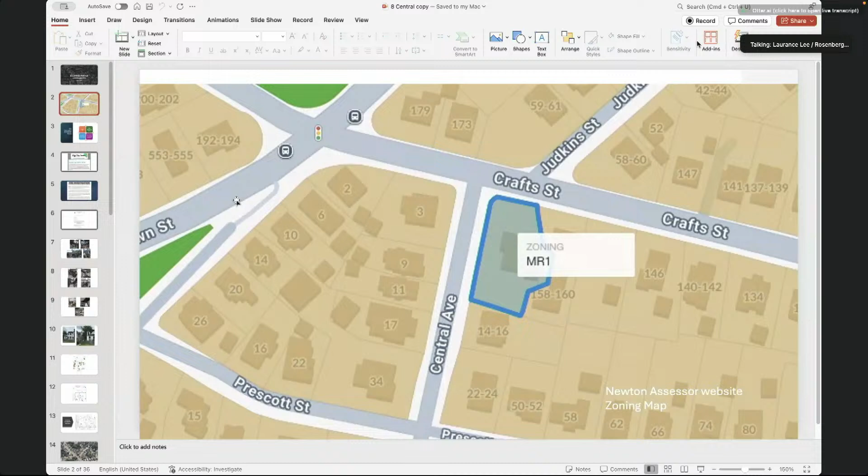So we're at 8 Central, which is in Ward 2, at the corner of Craft Street and Central Avenue. We're located in an MR1 zoning district. As you can see by my cursor, the blue outline is our property, and we are just on the edge of Ward 2. Right on Craft Street, that's actually the border between Wards 1 and 2. What we're looking for is a special permit for 3 single-family attached dwellings on 15,000 square feet of land. Currently, the by-right use is a single and 2-family house, and the 3-family requires a special permit.

So very quickly, to take you back about a year or so, there was an unfortunate fire at the former house, which was on the National Historic Places. There was a 3-alarm fire, an unfortunate construction-related fire that started and really created a hazard and rendered the property quite unsafe and really not salvageable. These are some articles I'm showing for you tonight that I also showed about a year or so ago at the Newton Historical Commission.

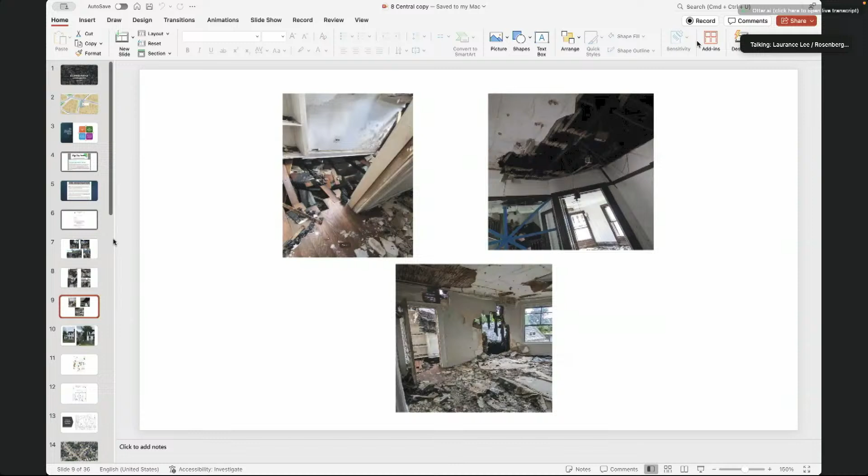So after the fire, the Inspectional Services Department deemed the property unsafe and that it really was in danger of collapsing. There are some photographs of the house that was damaged, and this is some interior photographs that we had to quickly take to assess the structural integrity of the house. I can come back to any of these. It was very substantial damage, unfortunately.

And here's some exterior photos. The former house was very, very close to our next door neighbor, as you can see from this photograph, and you can see it on the site plans that I will show you at a later time.

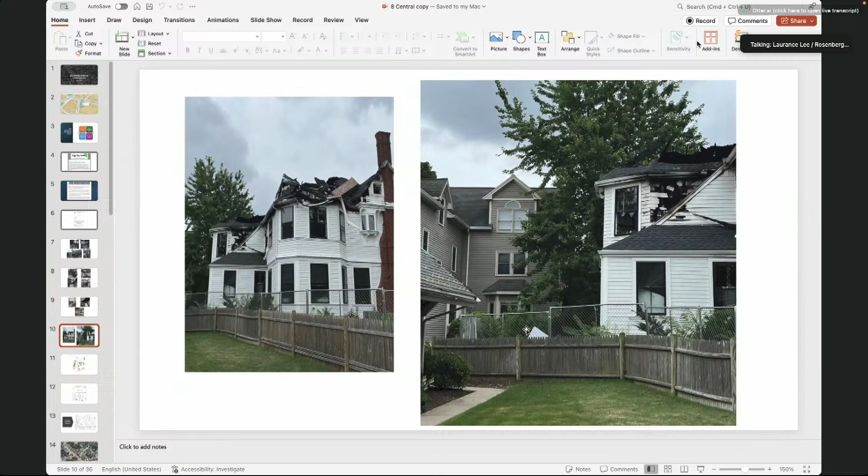These setbacks, which are not shown on this land court plan, are just around 10 feet, just by way of reference.

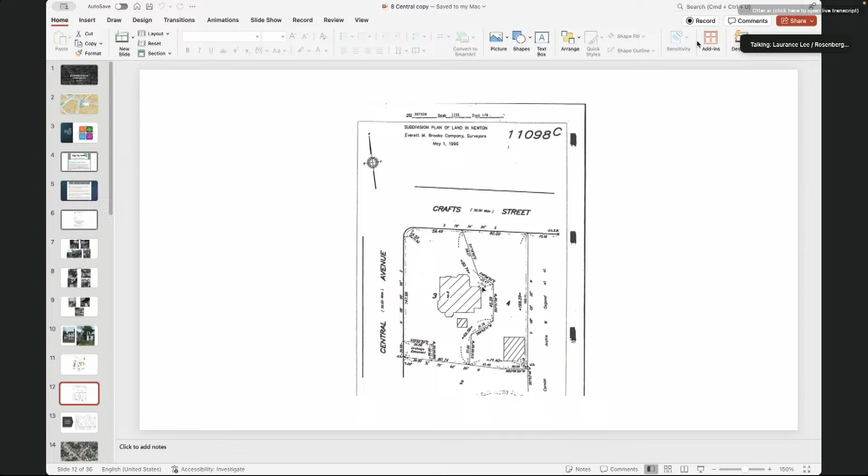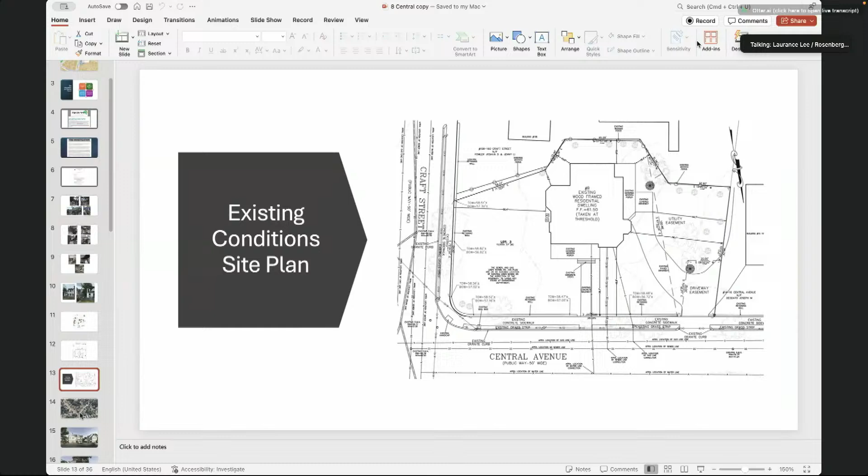Here's an existing condition site plan that gives you a little bit more detail of the house that was previously there. Again, the side setbacks were just conforming to new lot standards at 10 feet, and it was quite close to the border.

Here's a rendering of what it may look like with a new proposed development, which is broken up into 2 different buildings. This is right at the corner, this is Central Avenue, and Craft Street is on this side. Here's a Google Earth image with a computer generated image of what the house may look like.

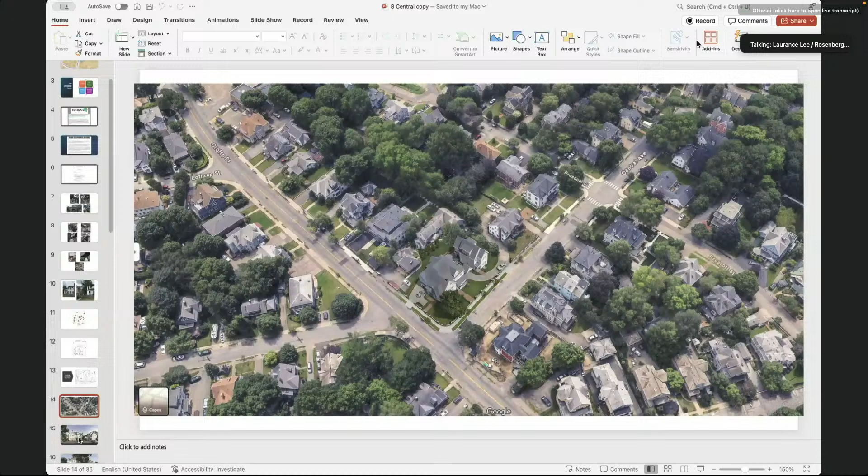My client understood very well that this is a very prominent, very visible corner. When he took on this project, he knew that, number one, the house that was there could not be salvaged, and two, that he had to really put something that kept the spirit alive. So here, I think the planning department noted a lot of the architectural features, the porte cochere, the covered porch, gable dormers, the ornamental features that were previously in the Queen Anne building, and it's now trying to replicate that to a certain degree in the project.

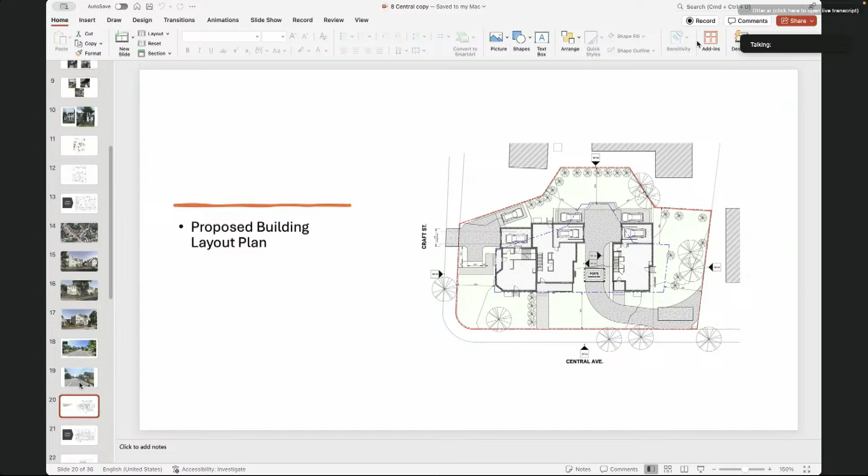Proposed condition site plan. Again, this will be building number 1 with 2 units, building number 2 with one single unit. There's a shared driveway that comes on Central Avenue here. A 1-car garage for one unit with exterior parking and a mirror image on the other side. The unit on Craft Street has its own driveway, and there's an exterior parking space to the left of the garage.

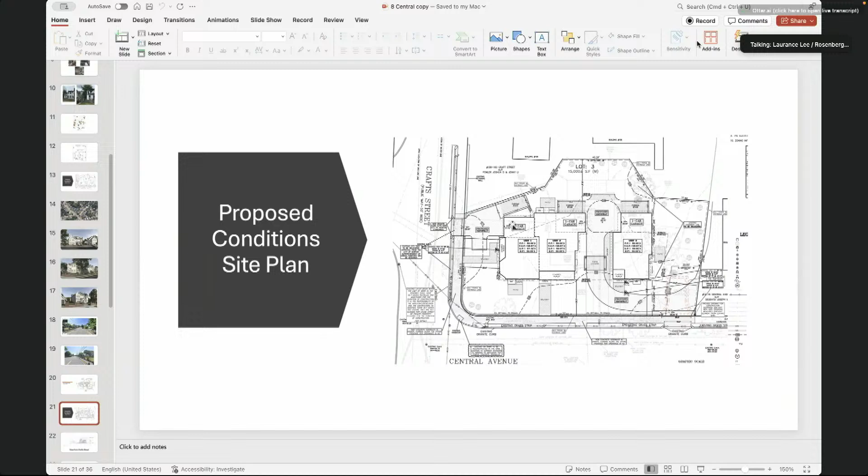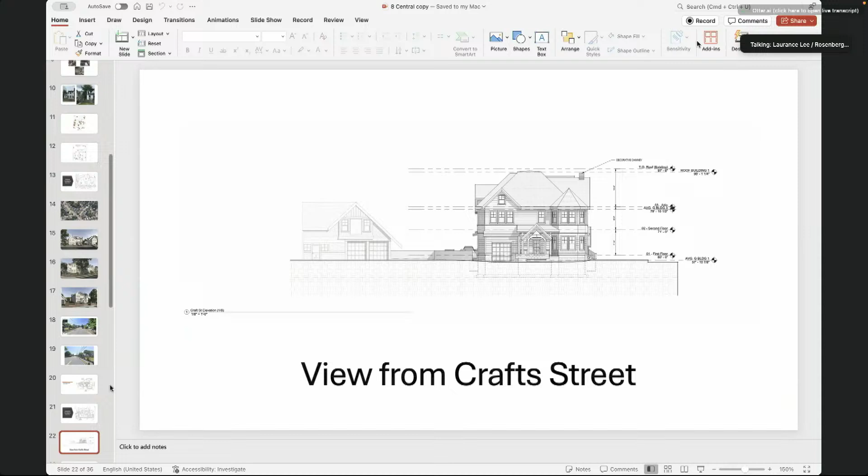Here's a 2D elevation, a view from Crafts Street, our neighbor. To the left here is building number 1. We can come back to any of these if you'd like to see them again. View from Central.

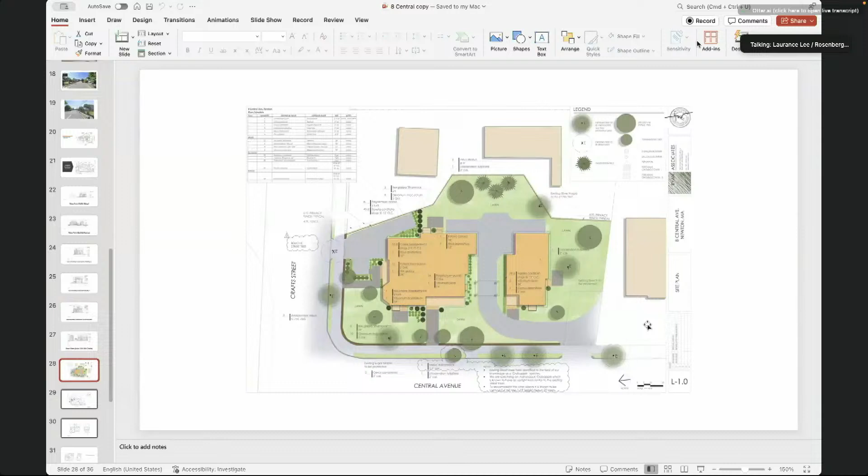We've had our neighborhood meeting, of which Councilor Lucas was there via Zoom, and we've received very good feedback in terms of the design and layout of the buildings.

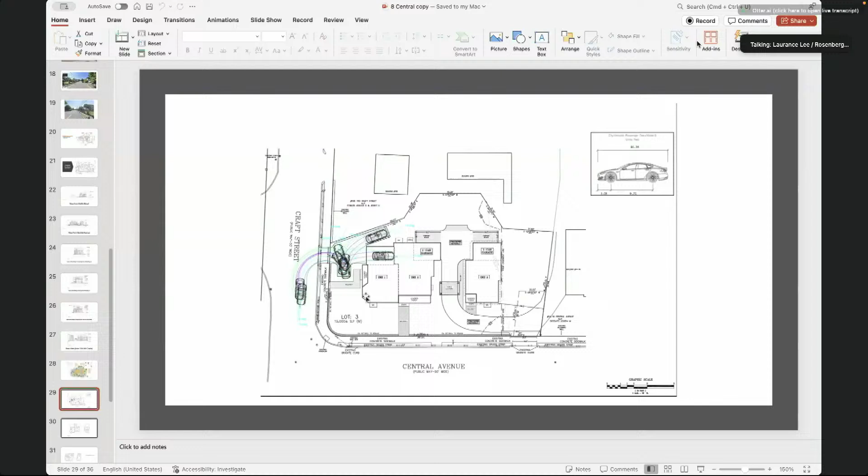Councilor Lucas had requested that we do a turning radius plan on the Crafts Street side. One concern he expressed to me, because he lives nearby, was that as cars come out on Central Avenue, he wanted to ensure the sight lines weren't impacted by the building. As you can see, the building is set back pretty far from the property line and the street, so the sight lines will not be impacted by the building.

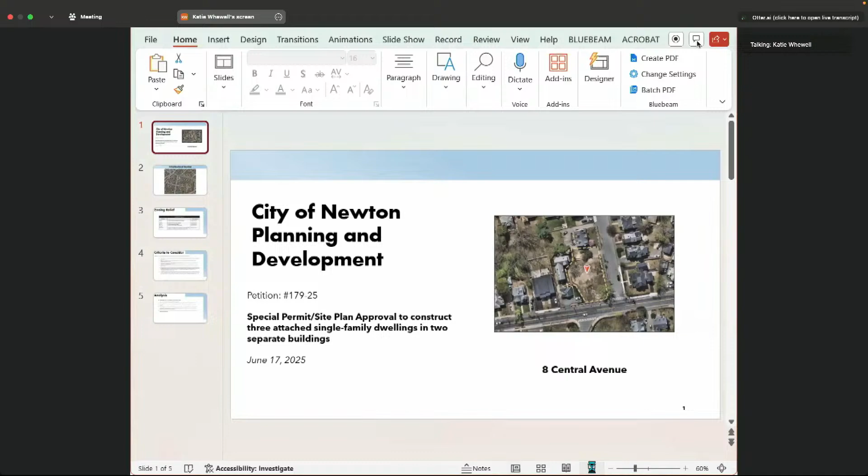179-25, a special permit to construct 3 single-family attached dwellings in 2 separate buildings. The subject property consists of a parcel measuring 15,000 square feet in the multi-residence, or MR1, zoning district. It's located at the corner of Central Ave and Crafts Street and was previously improved with a single-family dwelling constructed circa 1884, also known as the Amos Judkins House.

The site is currently vacant due to a 3-alarm fire in 2024, and a subsequent demolition permit was issued in October 2024 to raze the remaining structure. The area is predominantly residential in the immediate vicinity, with a mix of single and 2-family uses, in addition to commercial uses southeast of the site on Crafts Street and northeast of the site on Watertown Street. The immediate area of the site is also zoned multi-residence 1.

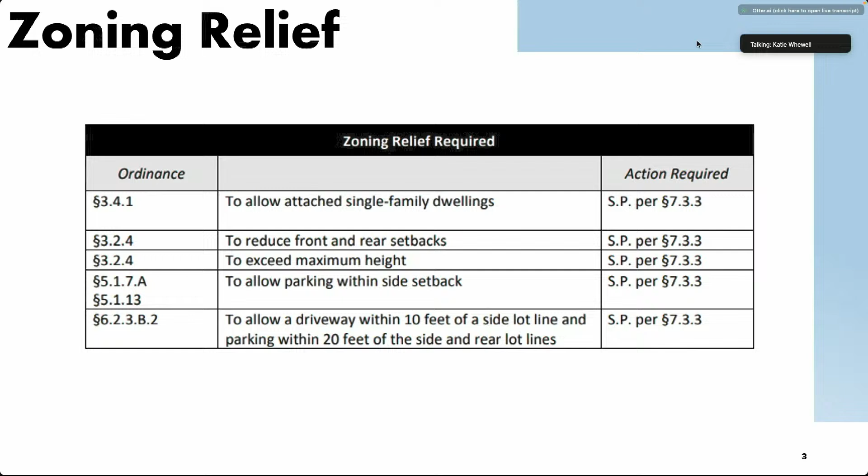The petitioner proposes to construct 3 single-family attached dwellings in 2 separate buildings. As designed, the project requires zoning relief around the site design, building design, and use—specifically, the use of single-family attached dwellings, to reduce the required front and rear setbacks, to exceed the maximum height, to allow parking within the side setback, and to allow a driveway within 10 feet of a side lot line and parking within 20 feet of the side and rear lot lines.

Some planning analysis: we believe the requested use is compatible with nearby uses. It allows for one additional unit above what is allowed by right. The massing is broken up between two separate buildings to mitigate additional building area. We noted many architectural features that point to a thoughtful consideration of design to mirror the 1884 Amos Judkins house. We also note that the height of that house was non-conforming at 39 feet, where 36 is the maximum allowed, so the requested height exceedances of 36.14 feet and 38.19 feet are not dissimilar from the prior building.

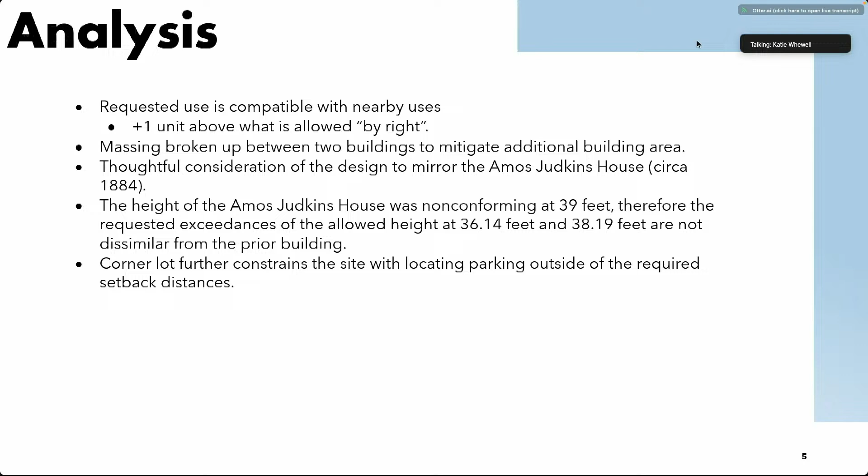Thank you very much. Before we take it into committee, I'm asking if there are any members of the public, either in the chamber or online, who have comments or questions to raise during this public hearing. Raise your hand virtually, or if something comes up later, raise your hand and I'll try to call on you. I don't see any public comment at this time, so we'll take it into the committee.

Are there councilors who have questions or comments about this project? Councilor Leary.

Thank you, Madam Chair. I remember that fire very well because I live fairly close to this location. It was really a tragedy because it was a beautiful Queen Anne home, and I was looking forward to seeing it totally redone. I do appreciate the architectural efforts here—I think it's very similar to the building that was there, it's a very attractive look, and it fits well into the neighborhood. I don't really have any concerns about it. I would like to maximize greenery and reduce any impervious surfaces as much as possible. I am assuming this is an all-electric building, as they usually are now. I don't have any other questions besides that quick review. I think it's a lovely design. Thank you.

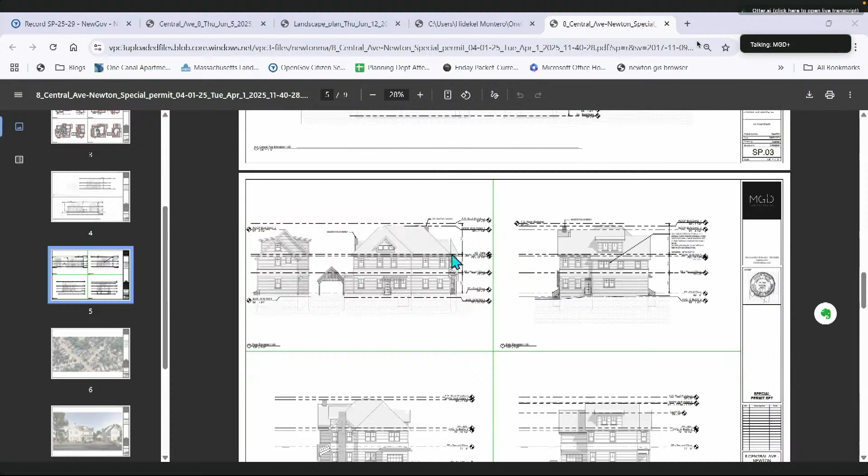And you can use your cursor to point out what you're talking about and where and why. So the building one height, if you can please just show us the building height. I'm sorry, is on the building one height that I wanted to show. Want me to go to the civil plans? I think these architecturals are still showing the maximum height of the building, sorry. The elevation that you were showing, oh okay, it was on the right side.

So I have the Central Ave and then the Crafts Street. Central, okay, I can zoom in on the elevation. I think you can see, if you can just enlarge that so we can see the maximum height that we are showing is 38 feet 2 inches for building one.

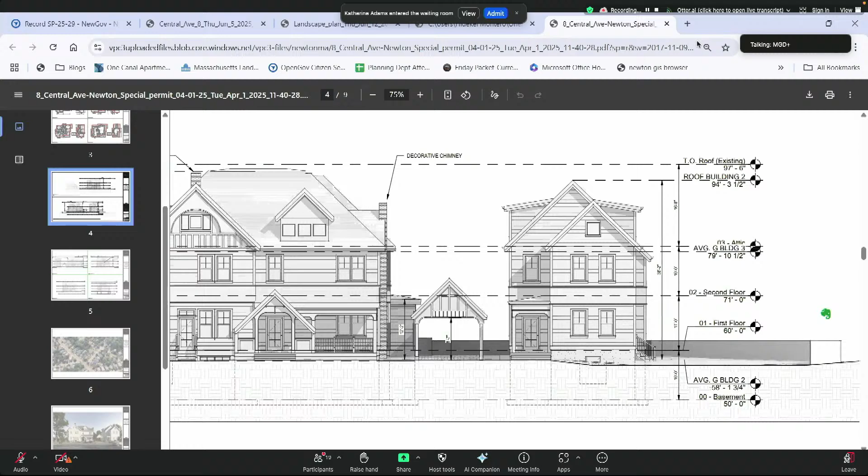And the new building is the one that we try to stay within the maximum height. I think if you can just enlarge that as well so we can see it bigger. So we can read, yes, it's at 36 feet 2 inches, which I would say regarding this, this is the second building, that we call the main building and the second building. This one with the 36 feet 2 inches is probably because there was a moment when we were adjusting the average grade for the building, that probably made that increase.

Honestly, I have to go back to our records. I think the 2 inches, if that is something that the commission would like us to adjust to stay within the maximum height, I'm pretty sure I can review that. Regarding the other building, the one I call building one, we have a higher building here, and this is the one we were trying to preserve the language for the roofs and all that explanation that I made before.

Councilor Block, you did have some other sort of massing footage questions relating to this. I think she certainly just talked about the height, but did she hit everything you were asking about?

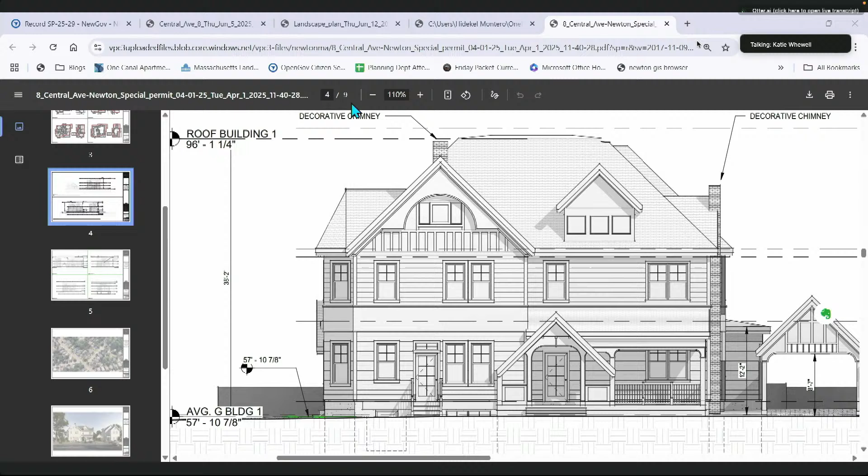Madam Chair, if I may jump in too, I'd like to remind the committee that FAR does not apply to single-family attached dwellings, so there is no relief around FAR. There's no limit to FAR for single-family attached. It's a number that we ask the applicant to provide, and we provide it to the committee, knowing that it's a number the committee sees often and is comfortable with. But I'd just like to remind everyone, there is no zoning relief for FAR. That metric does not apply to single-family attached dwellings.

Thank you, Ms. Whowell, for that reminder. That's really helpful for us to always keep in mind. My sense of Councilor Block's question was about comparing to what is existing and what was, not that this was a legal requirement we needed to follow, but I don't need to speak for Councilor Block. He can follow up with his questions.

I have a few hands next. Do you want to finish, Councilor Block? Yes, thank you, Ms. Whowell, for that reminder. And since you put it in that context, do you happen to have the FAR for the building that was destroyed by fire?

I don't have, I don't know if the, well, our design team has it. So we had limited information about the existing building that was demolished afterward. I remember that we saved some information regarding the height of the building, but I can certainly go to my records and see if we have ever been able to calculate the actual FAR of the building. I will take just one second to go through that.

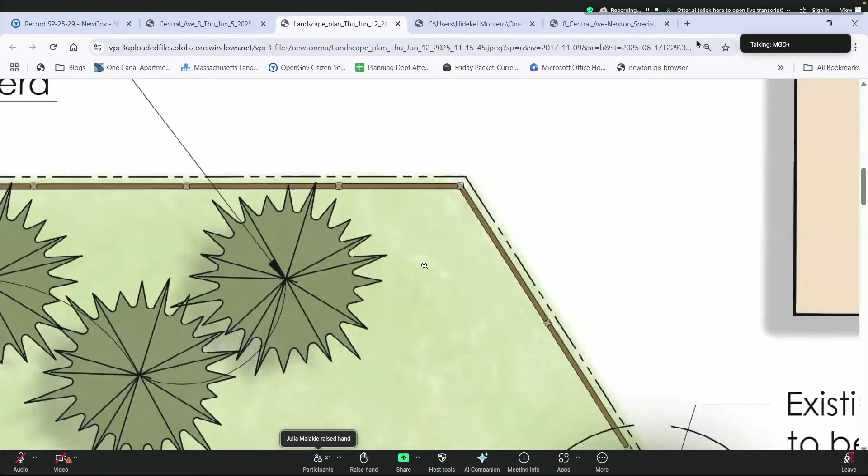Let me just, I'm sorry, the drawings - if I have the ability to share, if someone can help me just show the site plan. That curb cut is existing and is shared with the abutting property on the right side. So what we tried to preserve was that existing curb cut, and the driveway then takes this shape that it goes through between the buildings to the rear of the lot where we accommodated the cars.

Taking into consideration that in the previous existing building we didn't have the cars in the front of the lot, we thought it was a way to preserve what used to be part of the street view in this location. So that made that driveway longer, probably, than necessary. Now if we can replace 50% of that or not, it's kind of difficult for me to say what the number is without doing a quick calculation.

But I can say that, as you can see where the entrance of the curb cut is, the driveway at the curb cut location, we can replace a large portion there with a nice apron, then continue with asphalt up to the area where we have this covered space. We can replace those for permeable pavers. And then when it comes close to the garages, we can replace all that back section for the parking spaces, as well as a decorative portion of that section of the driveways with permeable pavers.

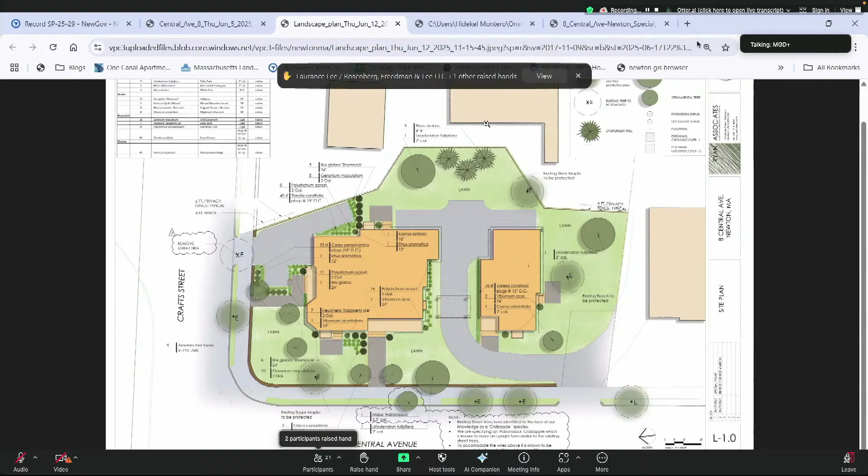Same thing on the Crafts side. I think the whole parking space area can be replaced by permeable pavers. And then we can create a decorative band around that driveway parking section using permeable pavers. I don't know if that is sufficiently descriptive, but I picture in my head something that can be decorative as well as responding to the permeable request.

I'm going to let Councillor Leary respond, but for me, I don't understand why you want to keep any of it as asphalt. The curb cut, it doesn't matter what the material is. This entire driveway could all be permeable pavers with an edge treatment and an apron. I don't understand why you feel there's a need to have any of it be asphalt, but perhaps that's not what Councillor Leary's getting at.

So would you like to have one more shot at that? And then we should really move on. No, I was getting at that. Okay, thank you Chair, I think you expressed that very well.

That would be ideal. And what I'm thinking here is that perhaps we could have it subject to second call, so we could see the design of the driveway and vote on it subject to second call at our next city council meeting. I just want us to have a clear understanding of what it is we're voting on.

Lawrence Lee, we have another councillor's hand up. Are you trying to address that question specifically right now, or can I call on the other councillor first? Yes, I would like to at least give you a definitive answer in terms of what my client can commit to.

Thank you. All the exterior parking spaces, he can commit to doing permeable pavers. And to the extent where, so that automatically increases what it currently is. And then to the extent where we can add any portions of the driveway, we can do so. But at the very minimum, we can commit to doing that for all the exterior parking spaces.

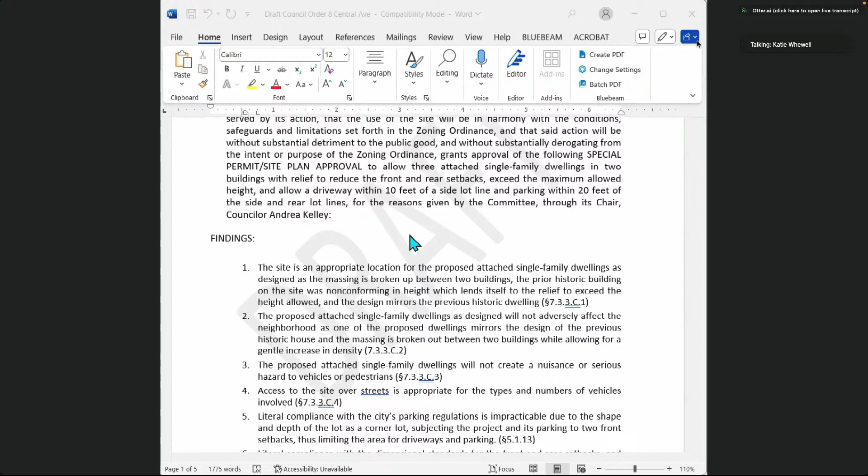Madam Chair, I've also been listening pretty intently and trying to draft a condition as the information comes up, so I think I have something that reflects typically what we see when that condition is added. This is the council order. The findings: we utilize that the site is an appropriate location for the project as designed, as the massing is broken up between the two buildings. The prior historic building on site was non-conforming in height, which lends itself to the relief.

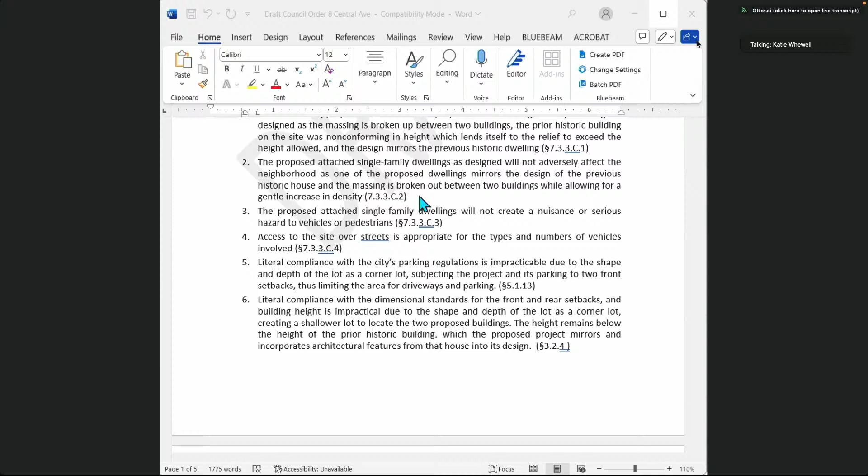And the design mirrors a previous historic dwelling. Will not adversely affect the neighborhood, as one of the dwellings mirrors the design of the previous building, and the massing is broken out between two buildings while allowing for a gentle increase in density of an additional unit allowed above what is by right.

Will not create a nuisance or serious hazard to vehicles or pedestrians. Access to the site over streets is appropriate for the types and numbers of vehicles involved. Literal compliance with the parking regulations is impracticable due to the shape and depth of the lot as a corner lot, subjecting the project and its parking to two front setbacks, also limiting the area for driveways and parking due to the shape of the site.

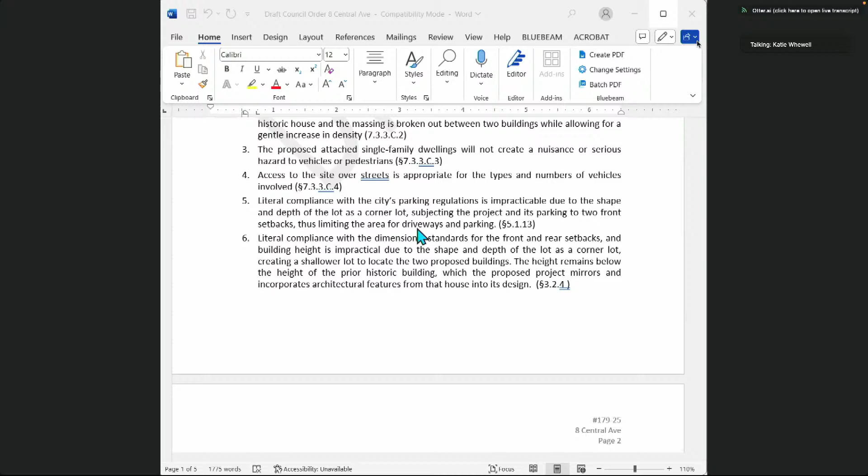Literal compliance with the front and rear setbacks and the building height is impractical due to the shape and depth of the lot as a corner lot, creating a shallower lot to locate the proposed buildings. The height remains below the height of the prior historic building, which the proposed project mirrors and incorporates architectural features from that house into its design.

Moving along to the conditions, we have the standard plan referencing condition in condition 1: the site plan, architectural plans, landscape plan. You'll see highlighted is the condition based on what I heard tonight: the petitioner shall incorporate permeable materials for all surface parking spaces and in the construction of the proposed driveways. So sort of editing as I went there, but when Mr. Lee confirmed the driveways, I was able to make it a little bit cleaner. So that should handle not needing any new plans before this goes to council if this were to be approved.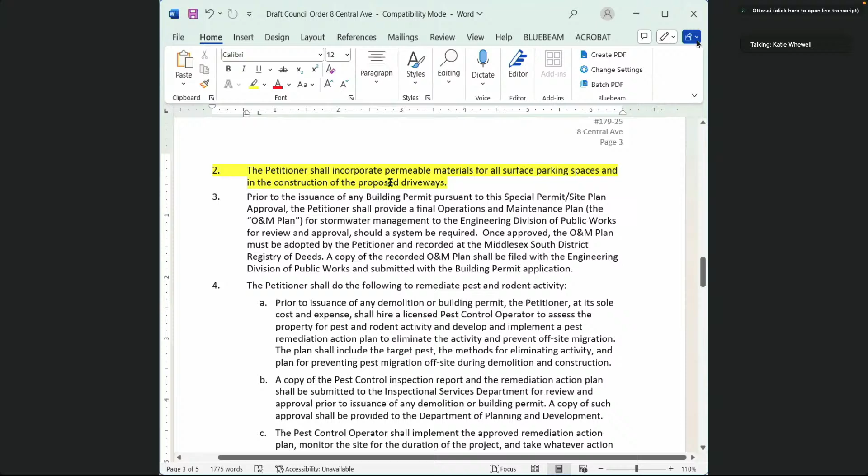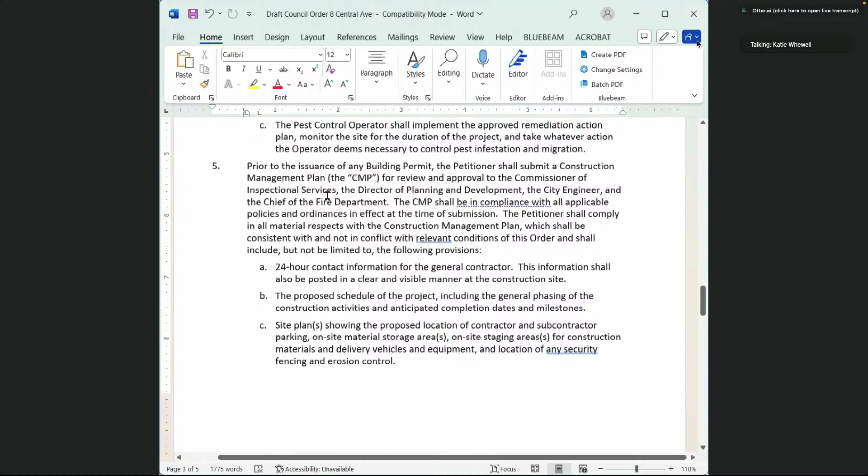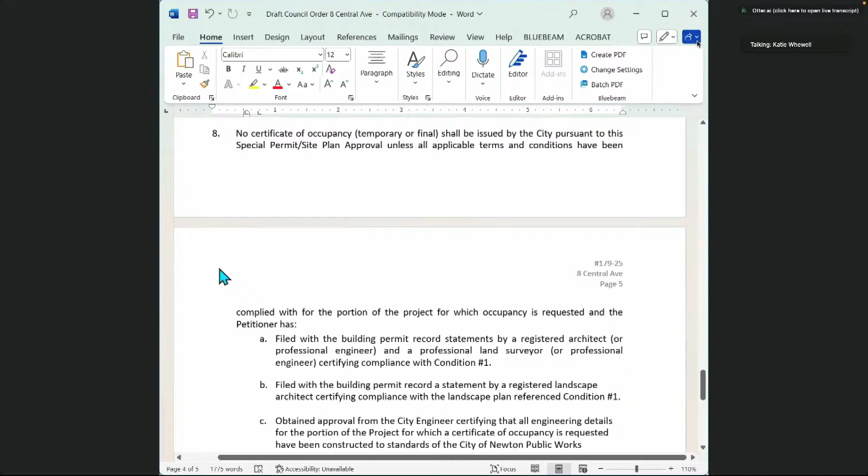We have a standard O&M plan from engineering, standard pest and rodent condition, standard construction management plan condition, construction hours, standard building permit with the requirements that need to be submitted with that building permit application, and then the standard CO condition, and then the condition on maintaining the landscaping that is referenced in the landscaping plan, and also allowing the commissioner to issue temp COs, which is also a standard condition. And that concludes the conditions and findings.

Thank you so much, and you did a great job incorporating that permeable sentence. Thank you. We do have a motion to approve before us. No other hands up, let's take a roll call vote.

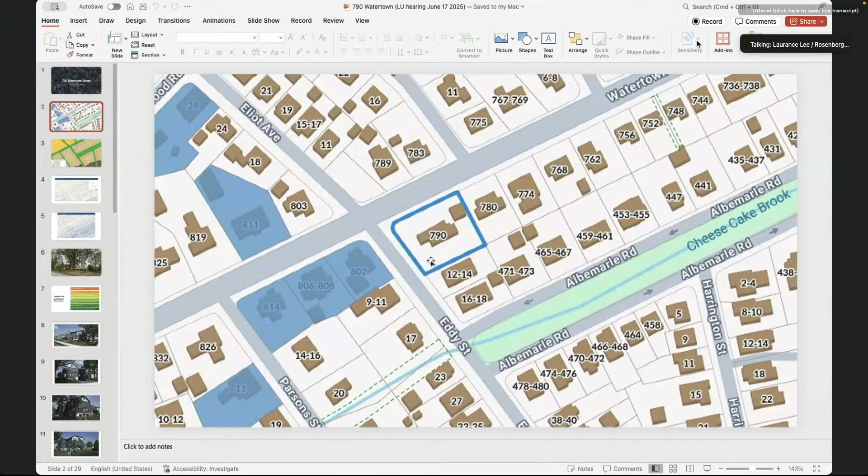This part of the property is very different from the one that you just saw. So I'm going to take you on a little bit of a tour, and then we'll go into the details. We're right at the intersection of Eddy and Watertown Street. One of the unique differences between this property and the one that we just saw is that we do have a conservation area. The Cheesecake Brook is right on Albemarle Road, as you all know, and a lot of our property is actually within the 200-foot riverfront area. I'll get into that in a little bit.

Likewise, we are in an MR1 zoning district. This is one of the larger lots in the area, as you can see from our direct abutters that are all 2-family homes. They're on smaller lots with 2 units apiece. So this piece right here is almost like a mirror image of our land with 4 units in total, just by way of comparison, relativity of size and scale.

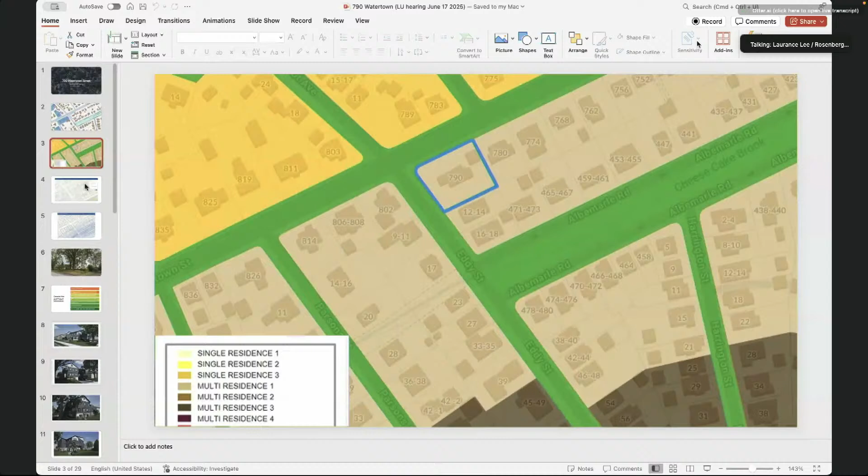...is the fact that this blue line represents the 200-foot riverfront area. Starting from approximately this location, going 200 feet, what we have obtained is an order of conditions. Prior to us coming before you, this project has actually been vetted by conservation, so public hearings have been held for that, and an order of conditions was issued for the project. It also was vetted by the Newton Historical Commission, so they've looked at the plans, they have waived the demolition delay, approving the design of the house.

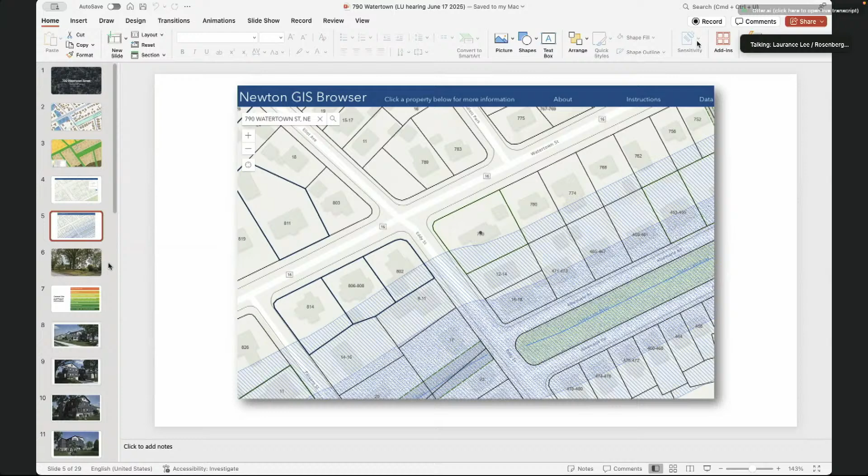So going to the site conditions, we have about 14,000 square feet of land, MR1 zoning district. I mentioned that this is in a 200-foot riverfront area. Conservation has reviewed and issued an order of conditions, and the demolition has been waived.

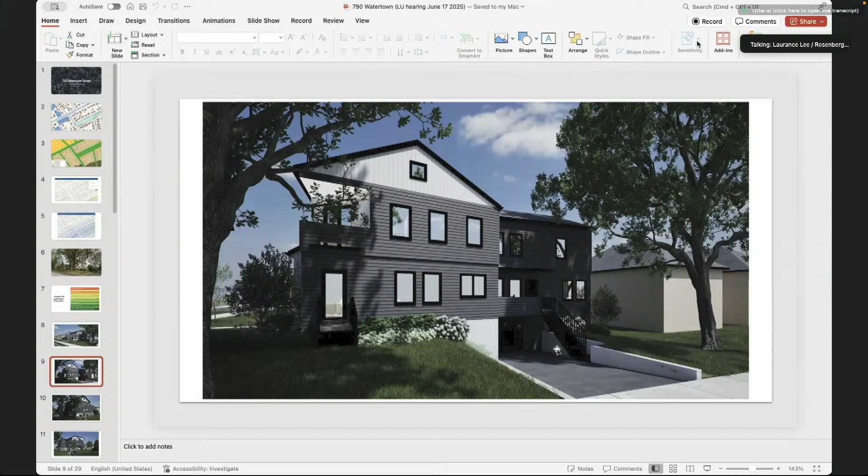The ordinance that was recently amended works like this: because the walls are within 25 feet of one another, they take the highest point of one end and the lowest point on another. If that's greater than 4 feet, even if the wall itself is under 4 feet, it triggers the 4-foot rule. So I wanted to make sure everyone understands it's not the series of walls that triggers relief—it's really just at the end, as we approach the house, that triggers the 4-foot retaining wall requirement.

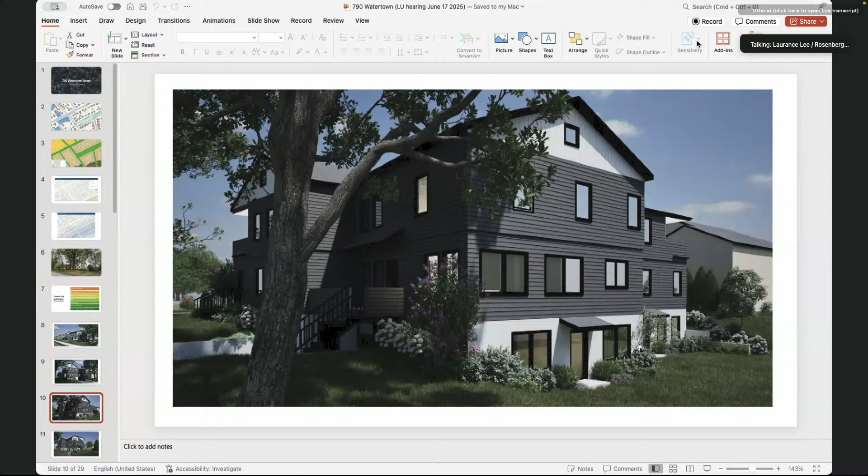Here's the view from the Eddy Street side at the back of the property. As the street and the property slope downwards, more of the house is exposed, just as it currently is. At the front of the property on Watertown Street, it'll be looked at as a 2.5 story tall building, as it currently is with the existing house. Once you get to the back, where it slopes downward, you see more of the house—hence the 3-story component you see on the waivers.

Kind of piggybacking off what we just heard in the previous petition—once you get into the MR district and single family attached dwellings, the FAR component is not a requirement and not a factor. That's because single family attached dwellings have a higher setback requirement, which squeezes the building towards the middle of the site so as to reduce the impact on our abutters, for example to our left and also to the rear in this instance.

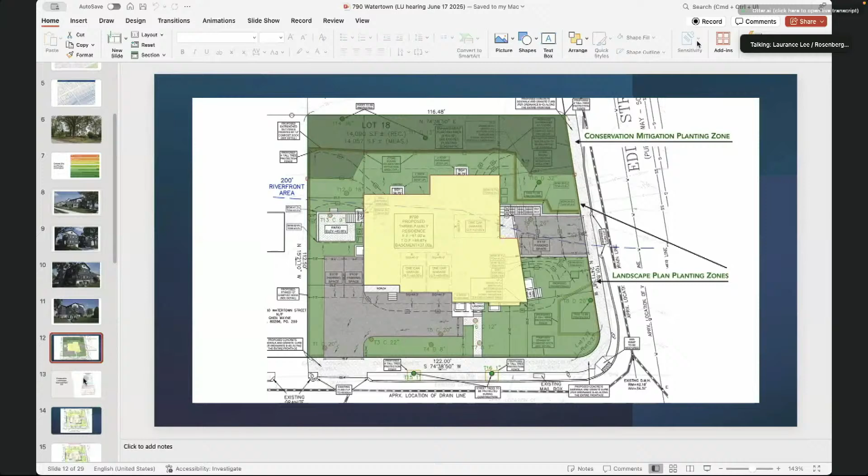It's a little too small to read, but this is all in your packet—this is the order of conditions with the planting list. It shows the rear of the property with the heavily planted area that's already been approved by the Conservation Commission.

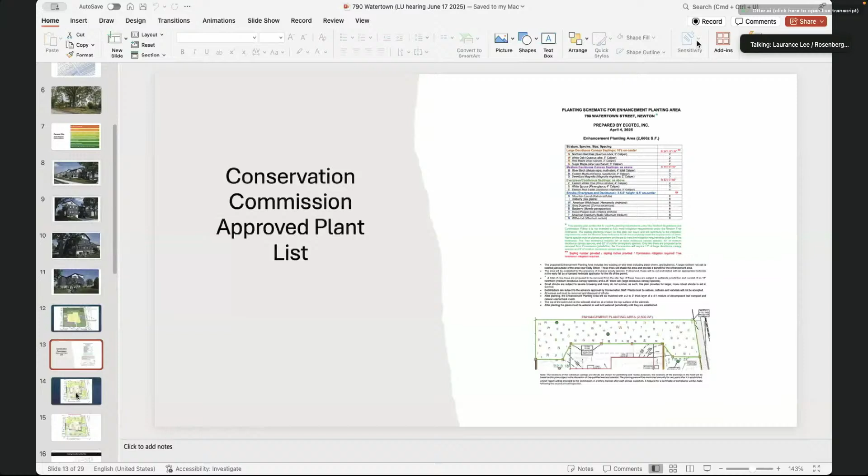There's also a landscape plan in your packet that gives a bit more detail. There will be some trees right along the front—privacy trees planted alongside. We've been in communication with our neighbors and had a neighborhood meeting.

Just as of today, we were contacted by a direct abutter with a rather late request, which we are going to honor. This next slide shows the request we received today from our abutter to the left. He and his wife sent an email in support of this petition to the city council earlier today, but asked us to shave off this red portion of the patio. We're going to cut this back, with some adjustments needed because there's a very short retaining wall along this edge. The idea is we'll shave this off and make minor adjustments so the area will be no bigger square footage wise than it is today, but we'll pull it away from his property line as requested.

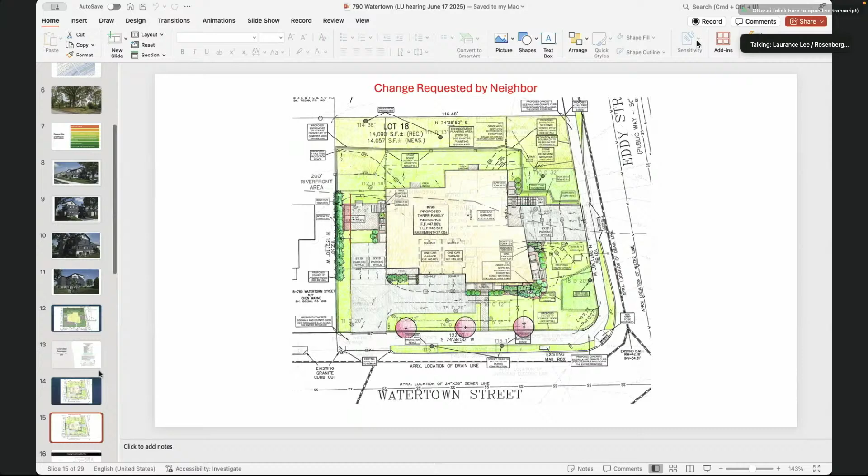Here's an existing condition site plan. One thing our neighbors appreciated was that there's an existing garage really close to the property line, and that's going to go away. That will also free up space and open things up. There'll be a 25-foot buffer between his property, our shared property line, and the new house, so there will not be a building here that's obstructive to them.

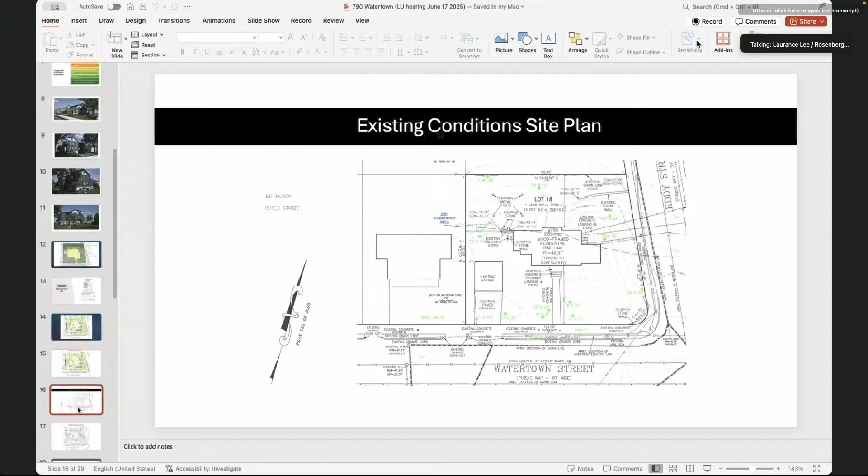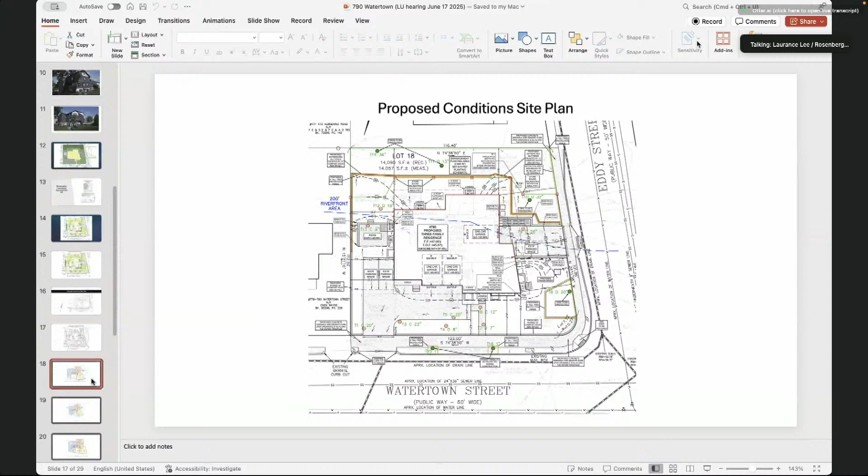For example, when you change the structure use—let's say even if the structure is as is, and you use it as a two-family house—the basement is counted at the midpoint of the average grades, compared with the average grade. If the midpoint is below the average grade, the basement doesn't count towards FAR. The moment you change that use from a two-family to, say, a three-family use, the mathematical formula changes from a midpoint to a two-thirds requirement, such that if the average grade is lower than two-thirds, then it counts. So in this instance, that's one of the reasons this is being viewed as a 3-story building, partly because of the grade.

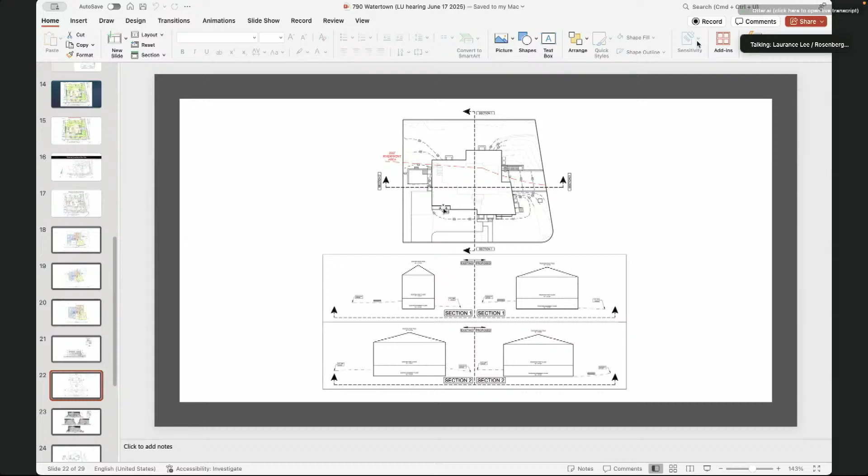Cross-section of the existing and proposed house. Again, any changes are really confined to the house itself. And regarding the retaining walls, one reason we did it this way was to preserve the grading so the tree located here, where my cursor is, is least impacted in terms of its roots and soils. We want to keep that undisturbed as much as we can at that location.

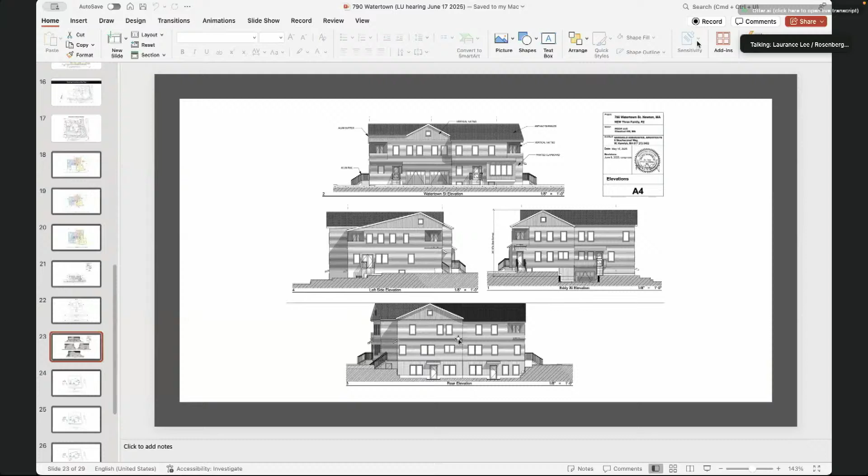These are the 2-dimensional elevations. We can come back to any one of these if you like. But to my point earlier, if you're standing on Watertown Street, this would really be looked at as a 2.5-story building. And then obviously as the grade opens up down at the bottom, you see more of the structure.

We have a turning radius plan that shows how the spaces will work. One thing pointed out is the pavement on the Watertown Street side. The existing driveway is really where my cursor is.

This additional pavement acts as a way to allow cars to turn around within the property before they pull out. We know this intersection at Eddy Street sometimes gets a little busy, so for safety purposes it's good for folks to be able to turn around here before pulling out onto Watertown Street. Currently that doesn't happen because there's a garage, and cars have to back out onto Watertown Street directly. I can come back to any of these plans if you'd like to see them again, but that shows pretty much every space and how it works, coming in and out.

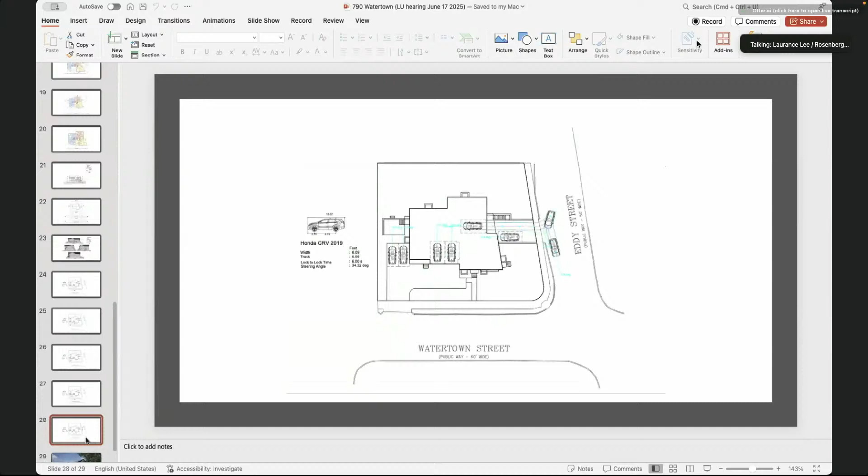And then we'll end on the rendering of the house again. Happy to answer any questions you may have.

Thank you, Mr. Lee, it was very thorough. Let's see what planning has to add.

Thank you, Madam Chair. This is special permit 155-25, a request to raze the existing dwelling and construct 3 single-family attached dwellings in one building. 790 Watertown is located in the Multi-Residence 1 zoning district. The site is located between the West Newton commuter rail station and the Newtonville commuter rail station. The immediate area consists of Multi-Residence 1, Single Residence 3, and Multi-Residence 3 zoning to the south along Washington Street, with nearby uses predominantly single and 2-family. The petitioner proposes to raze the existing single-family dwelling to construct 3 single-family attached dwellings in one building.

The proposed building is located in the center of the lot, with vehicular access from both Watertown Street and Eddy Street. As designed, the project requires relief to reduce both required front setbacks from Watertown Street and Eddy Street. It also requires relief for the use to allow a reduced required lot area, to allow 3 stories, to allow a driveway within 10 feet of a lot line and parking within 20 feet of a lot line, and to allow retaining walls exceeding 4 feet in height. Those retaining walls measure 4.8 feet, only slightly over that 4 foot threshold.

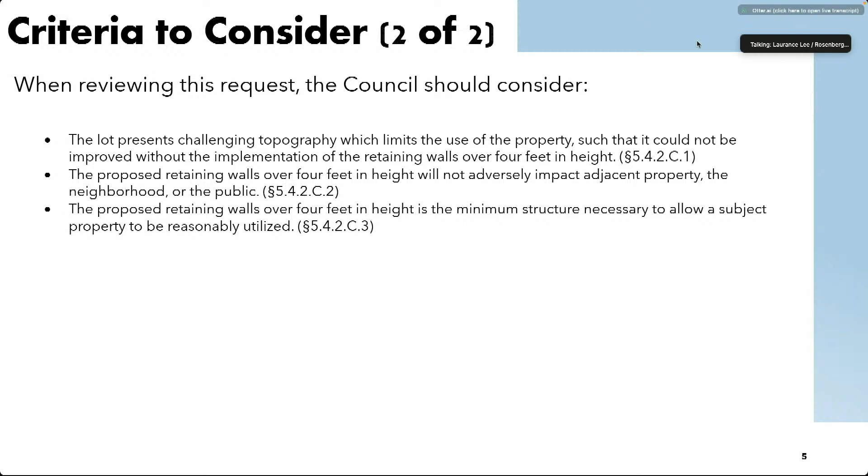Oh no, I apologize, I do want to just add one thing if the chair allows me, after you finish. So my apologies, Ms. Whewell. No worries, thank you.

Just some analysis: the use of single-family attached dwellings is appropriate for the site and neighborhood despite the reduced lot area. The lot is one of the larger lots in the neighborhood, and surrounding it are smaller lots along Albemarle Road where 2 units are sited. So with this larger lot, we thought 3 units is appropriate as proposed.

Planning notes that this project will result in a larger building type than is typical in the neighborhood. However, it wouldn't be completely out of context, as there are larger homes on compact lots further west along Watertown Street. We also noted that the frontage along Watertown Street features an excessive amount of paving, which in addition to the building area further reduces open space to 53.3%, where 50% is the minimum required. We know there are constraints balancing maneuverability and parking requirements while trying to reduce paving, but we do encourage the petitioner to reduce paving where possible.

That concludes the planning presentation. Happy to answer any questions.

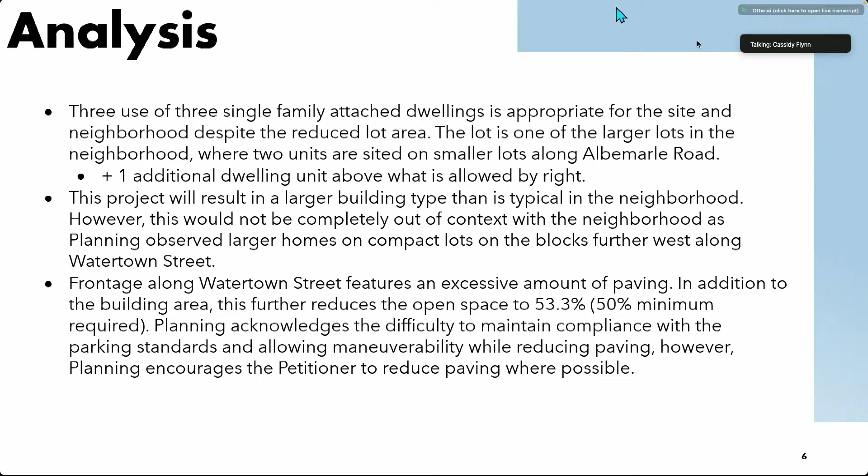Thank you, Ms. Whewell. Before we move on, and I would of course, if there's something important the petitioner needs to squeeze in here, we would like to hear it. But I prefer these meetings not to go back and forth as conversations.

But first, let me just, while I have you, Ms. Whewell, I think I may have misheard you at the very beginning when you stated the docket number you thought this project was. Could you say again what you thought this docket number was? I have 15525, I can triple-check, believe it's 177. Oh, I'm so sorry, probably a holdover from a template. Okay, I just want you to know when things get important that we're all talking about the same docket item. And I did check with the clerk, I think we can safely say this is 177-25.

Okay, Mr. Lee, do you need to say something right now? Yes, Madam Chair, two very quick things. I do want to just note, and I neglected to point that out, in terms of the setback requirement, the proposed transformer is because of the electrification ordinance.

Sometimes we run into this, and I think this was noted in the planning memo as well, so I do want to point that out. ISD views this as a structure which has to meet setback requirements. Hence, we've always been encouraged to add a proposed location. Ultimately, it's the utility company who has to decide, but wherever it ends up, we think it may be around here. If we can find a less visible location, we will certainly try to do that. And if the utility companies decide we have to put it in a prominent location like this, we will add some screening around it as allowed.

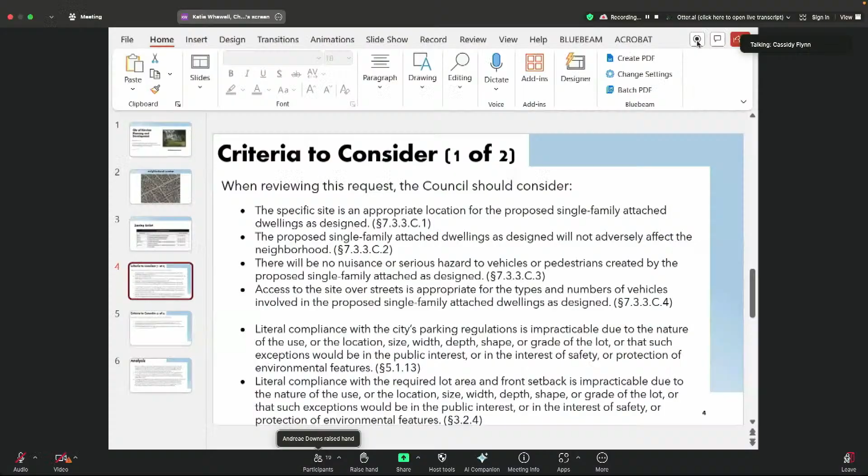Councillor Block, you had your hand up. Yes, thank you very much. If Ms. Whewell could put those criteria back up, I really appreciate the comment you were just making, because I was going to go right to that criterion, the safety one. I think it was the third one or the fourth one. Second and third were the ones I was focusing on too.

The second is also fairly vague. The third, talking about no nuisance or serious hazard to vehicles or pedestrians created by this design. I think the neighbor was pretty eloquent about the traffic conditions at this particular intersection. I know this intersection, it is very popular, and its crash history is well documented. Attorney Lee is correct in one sense, this is a pre-existing condition. That begs the question about whether this proposed design would add to the hazard to vehicles or pedestrians. And I think on its face, a second curb cut, as Councillor Lucas pointed out, is just by necessity going to increase activity and therefore increase the nature of the hazard.

I want to also say that I was struck by Councillor Leary's comment that this appears to be imposed on the neighborhood. That's a very strong way of phrasing it, and it resonated with me. So I agree with you, Madam Chair. I don't think there are the votes tonight to pass this, and I think holding it would be a really good idea. Thank you. We have somebody ready to make that motion. Councillor Leary, last comment, because I'd like us to move on.

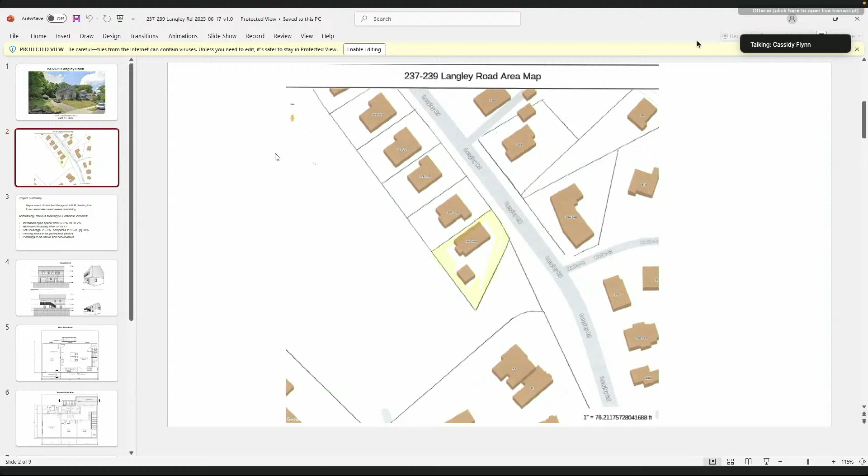One of the first things I did, of course, having been brought in late to the party, so to speak, was to look at the minutes of the land use meeting that were held that night. There were a number of concerns expressed, but I'm pleased to report that there were actually people in the neighborhood at 221 Langley who had appeared in support of the project, as well as one or two other people who supported the project. To the best of my knowledge, there were no opponents.

But the thing that intrigued me was, of course, the comments made by various councilors about the plans. Unfortunately, those reports don't mention who said what, but nonetheless, I set forth to try to address the concerns and questions that were posed that night.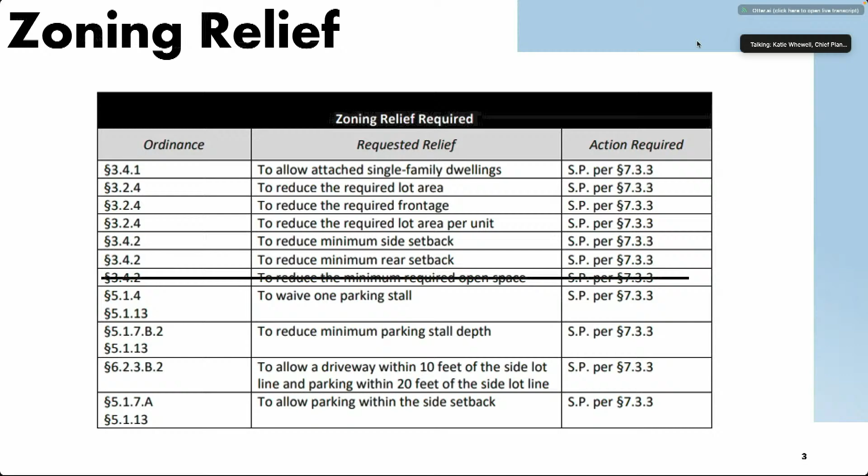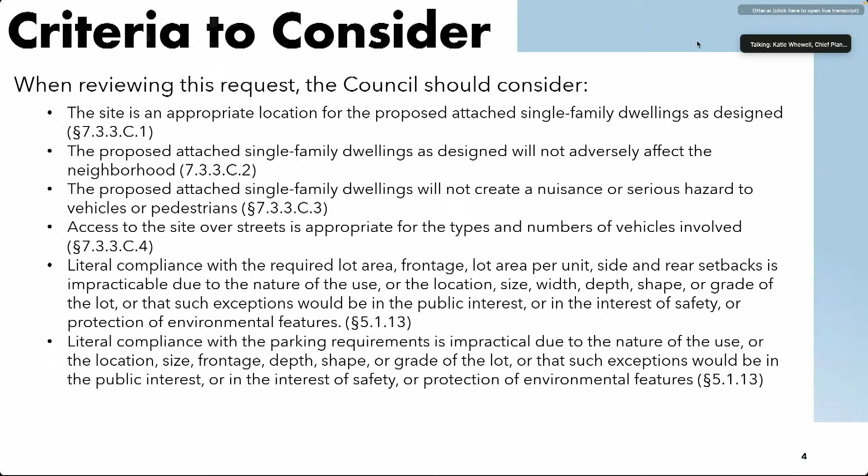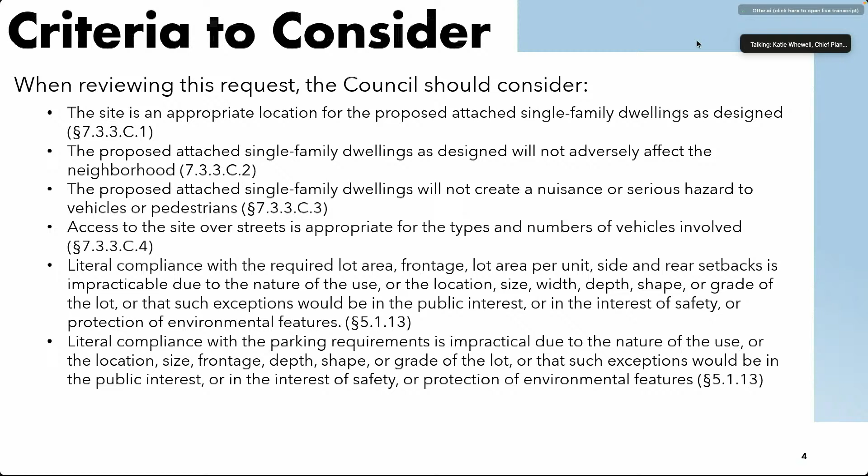So this relief was originally requested. In addition to the plan, we also requested a statement from the applicant that they no longer require this relief, which they have provided. When reviewing the request, the council should consider whether the site is an appropriate location for the proposed single-family attached dwellings as designed, whether they will not adversely affect the neighborhood, whether they will not create a nuisance or serious hazard to vehicles or pedestrians, whether access is appropriate for the types and numbers of vehicles involved, and whether literal compliance with the required lot area, frontage, lot area per unit, side and rear setbacks is impracticable, and whether literal compliance with the parking requirements is impracticable.

So just an update and some analysis: planning requested has been provided, as Attorney Morris noted, showing all building heights and the zoning table all on 1 plan. Planning notes that the proposed building is set back into the site and it will maintain that residential context of the surrounding buildings while allowing for 1 additional dwelling unit.

However, we do note that this project requires several items of relief to allow for this expanded driveway and all the required parking on site. This will result in an increase in paving and a reduction of open space on an already undersized lot.

We are supportive of the waiver of 1 stall given the location, size, and orientation of the lot, and the existing nonconformities. However, due to the site's location within 1/2 mile of the Newton Centre MBTA station, staff would be supportive of a greater parking waiver, such as decreasing that ratio to 1 car per unit or less, to allow for increased open space on site. That is a trade-off planning would be supportive of, to see more green space and reduce the parking below 2 cars per unit.

So that concludes the planning presentation. Happy to answer any questions or bring up any plans.

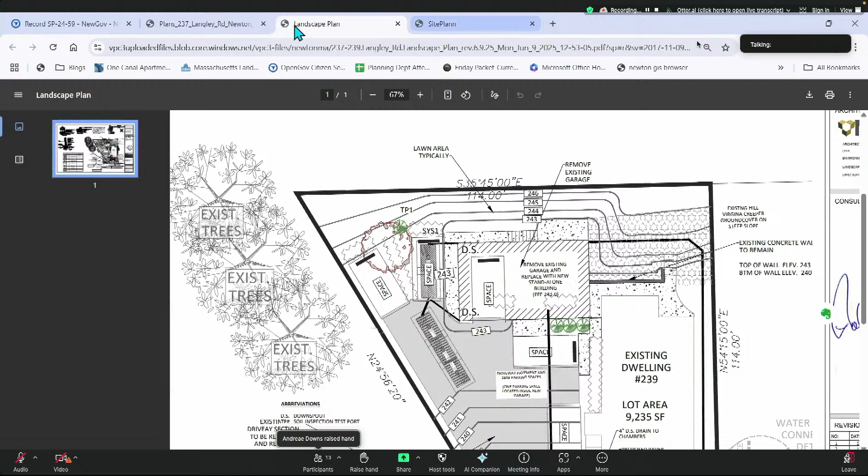It's not shown as attaching to the existing house anywhere, is it? No, it does not attach to the existing house. It's not attached, this is a standalone, detached building. It's close, but yes, it's detached, 3 feet away, I think, as noted in the memo.

And thank you for updating that site plan to show particularly the grades, the existing and proposed. That was a missing thing, and we're happy to see that again.

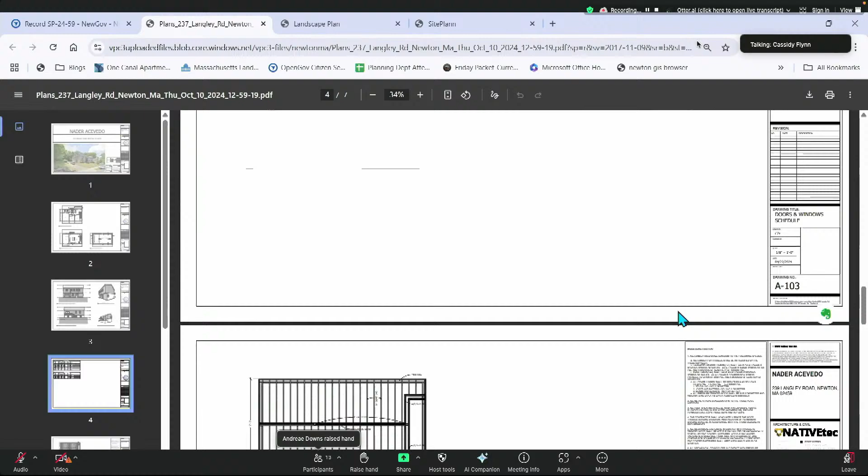Okay, are there any members of the public who would like to speak? I saw a few names before that I recognized that I wondered if we're here for this. No hands from the public. Okay, we will take it into committee.

Councilor Downs, followed by Councilor Lucas. Thank you, Chair. I would support planning's recommendation to reduce the parking to 1 space per unit in order to make this slightly less parking dominated and go better with the aesthetics. Other than that, I think this is a fine proposal and I would support it.

Thank you, Councilor Downs. Councilor Lucas? Thank you, Chair. Mr. Morris, congratulations, first of all. Hopefully you didn't trade your best player for pennies on the dollar. One more game Thursday night. All right, yeah, not number 11, no, trade him in the offseason.

So I just want to be absolutely certain what we are going to approve tonight. I understand your client lives in the current principal home, correct? Correct, and that's a 2-family home. Yes, it is. And they are going to move into the new home. Yes, that's correct.

And you said, can your client put up the floor plans? I just want to make sure we're looking at the same thing. Gabriel, can you put up the floor plans, the rest of the new unit? Okay, so the first floor has a living room, bathroom, closet, kitchen, and the garage that's there. Can you go to the second floor?

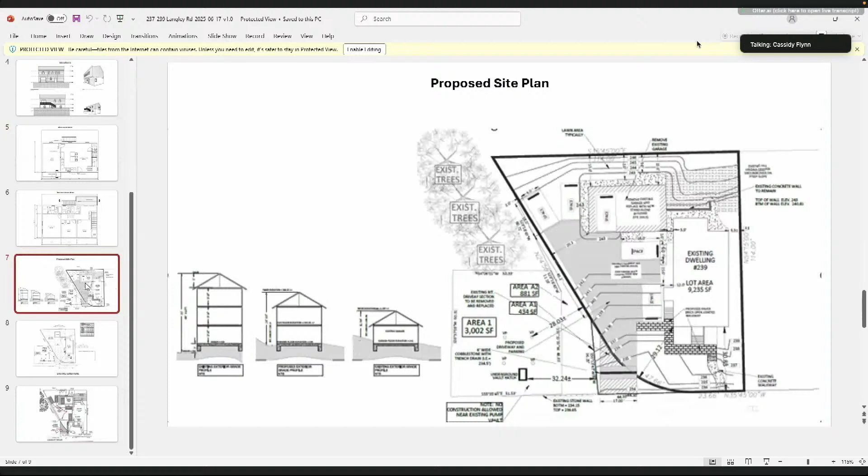Thank you, Chair. Could someone put back the site plan that shows the proposed parking stalls, Gabriel? Go to the circulation one. That more clearly demonstrates the parking. Yeah, there we go. Which of those spaces would you eliminate? Well, it's not for me to really comment on that. The one of the 2 at the top. Or the one in the middle. First of all, let me just say, I think that 2 parking stalls each for the 2 families that are living in the current dwelling, and 1 parking stall for the new house, let's call it, is perfectly reasonable from a utilization standpoint. So I guess I part company with Counselor Downs and perhaps Counselor Leary, if that's what you were suggesting.

And I'm not really sure that that's what Counselor Lebovitz was suggesting, but he can address that. But this is a very crowded site, and the two parking stalls that are nearly touching, what is the distance between those two stalls at its closest point? Well, remember, it's the stall, it's the dimensions of the stall, those aren't the cars themselves. I appreciate that. So what are the dimensions? 9 by 18. 9 by 18, and using 9 by 18, what is the distance between the outline of those stalls, the rear bumpers, that the driver of the car to the right could walk by? Do you happen to know what that distance is? It doesn't look very much. And that's a hazard.

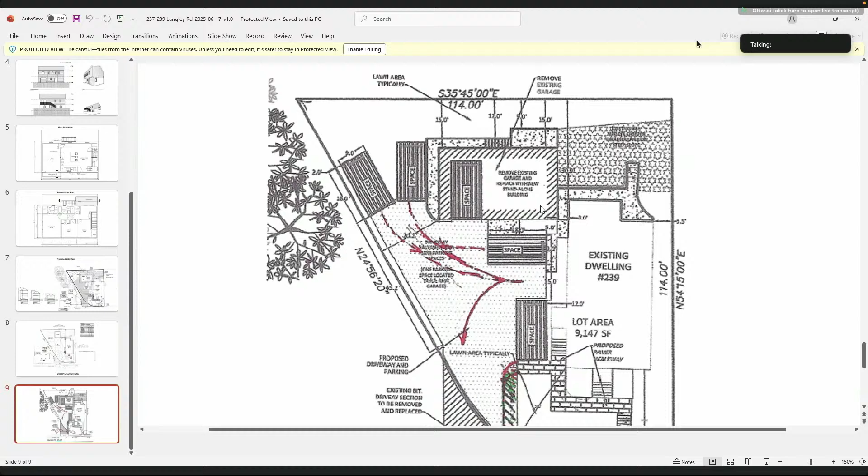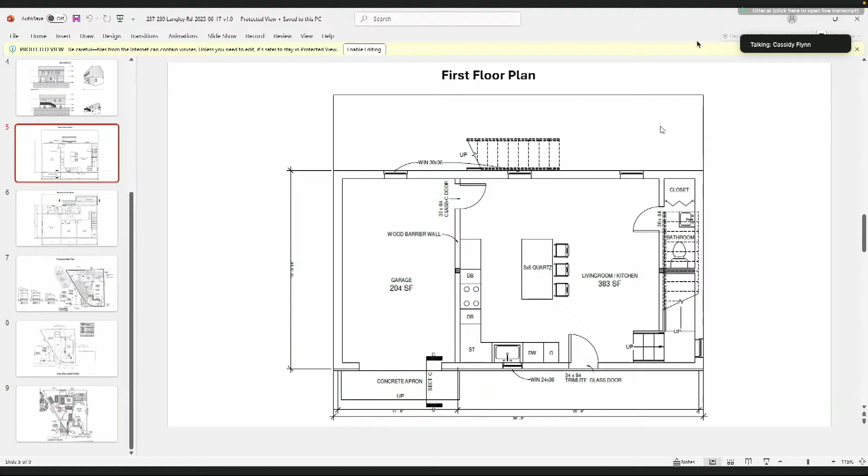Thank you, Gay. Also, my daughter Patricia, she's on the call. She was here 2 weeks ago, and she drove. She drives, and they visit me. Patricia was here 2 weeks ago.

Your family visits you, you want the parking spots, we've got it. I think we need to wrap it up. Mr. Morris, what is it you urgently want to say?

I think that 5th parking space largely serves as a visitor space, and to that extent, it's not contributing to the everyday ins and outs of the automobiles. I interpret it the same way. I'm like Councilor Block - for me, given this situation and this funny site and this family situation, I'm not opposed to the 5 spaces.

I want to check in though with Councilors Leary and Downs, and anyone else, perhaps Lobovitz, if it's a deal breaker for them to have these spaces, if they're going to vote against this project, I'd like to know that now so I can figure out if we're going to proceed with this.

You said that you would not vote for it if it had all these parking spaces? That's correct, Councilor Leary? I think it's a jumbled mess in there, and I think they could do with fewer. It's just not - it's not a special permit. When we do a special permit, we want it to meet certain guidelines and make it work. This does not work. It's just got a pile of cars all in one little small spot. Councilor Downs?

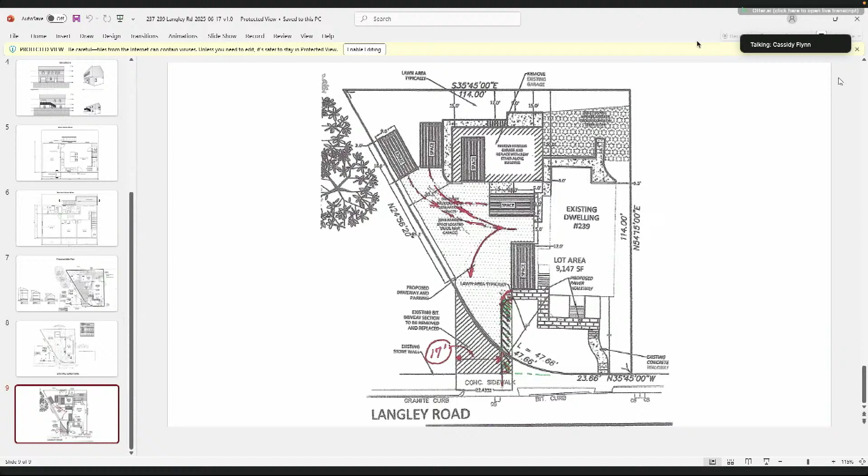Thank you. Let's look at findings and conditions. Sure, I will share my screen. I may need a little help figuring out where we landed with any parking, but we can get to that with the conditions. We didn't change it, okay, I'll take that out, including the size. Okay.

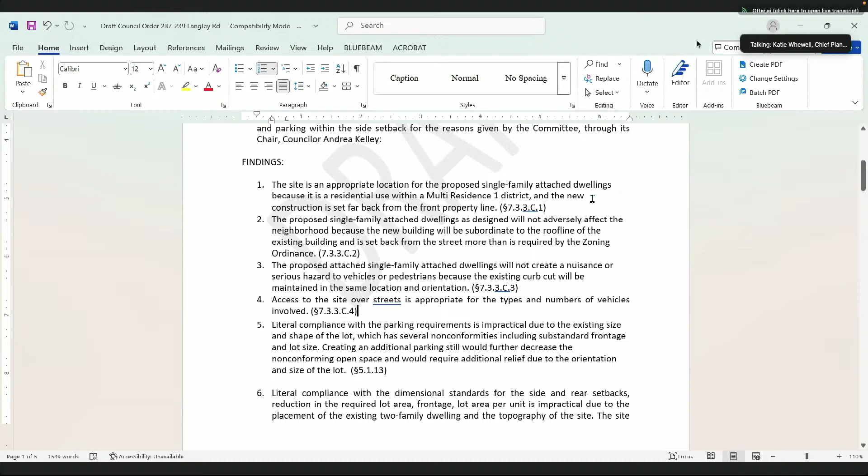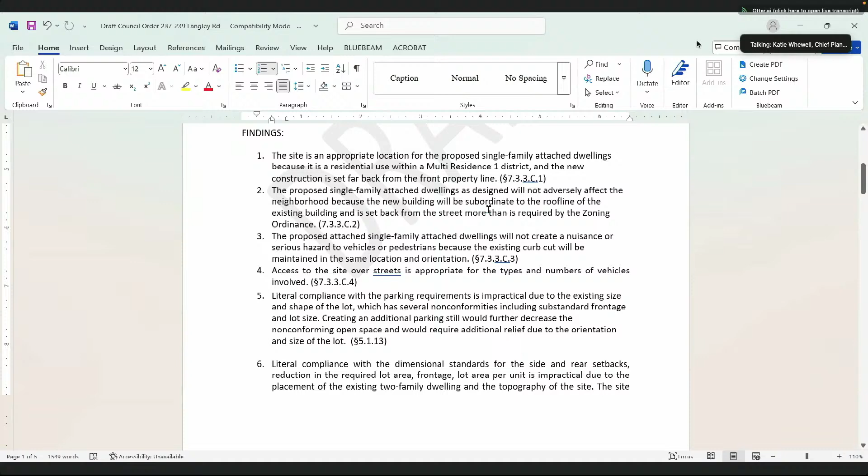So here we have the findings. The site is an appropriate location for the use. It's located in a Multi-Residence 1 zoning district, and the new construction is set far back from the front property line. It will not adversely affect the neighborhood. The new building will be subordinate to the roof line of the existing building, and is set back from the street more than what is required by zoning. It will not create a nuisance or serious hazard because the existing curb cut will be maintained in the same location and orientation. Access of the site over streets is appropriate for the types and numbers of vehicles involved.

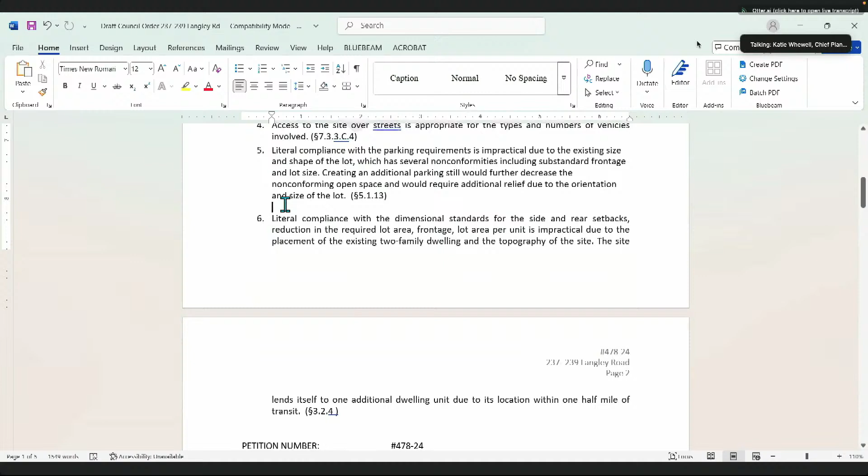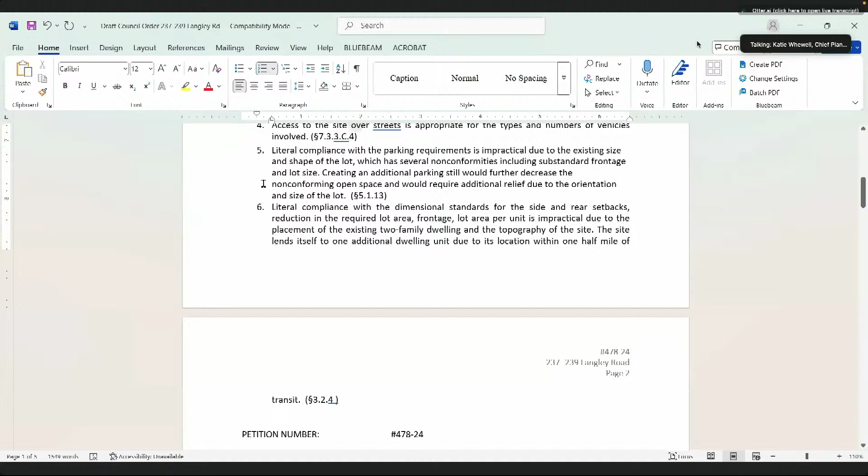Literal compliance with the parking is impractical due to the existing size and shape of the lot, which has several nonconformities, including substandard frontage and lot size. Creating an additional parking stall would further decrease the non-conforming open space and would require additional relief due to the orientation and size of the lot. Literal compliance with the standards for side and rear setbacks, reduction in lot area, frontage, and lot area per unit is impracticable due to the placement of the existing two-family dwelling and the topography of the site. The site lends itself to one additional dwelling unit due to its location within half a mile of transit.

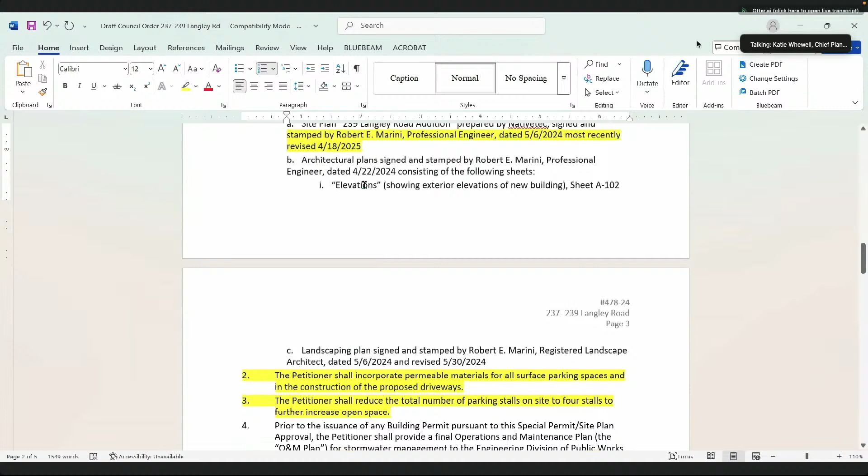So we'll move on to the conditions. We have the standard building permit condition, the site plan, and I will update that with the one received this week, architectural plans, the elevations, and the landscaping plan. I think we may have a new one as well.

Condition 2, I've added, based on Attorney Morris's statement, that the driveway will be permeable materials. I just wanted to confirm that the parking will too. I think Attorney Morris only said the driveway. No, I believe he said driveway and parking, and he's nodding, so I think it's correct. Thanks.

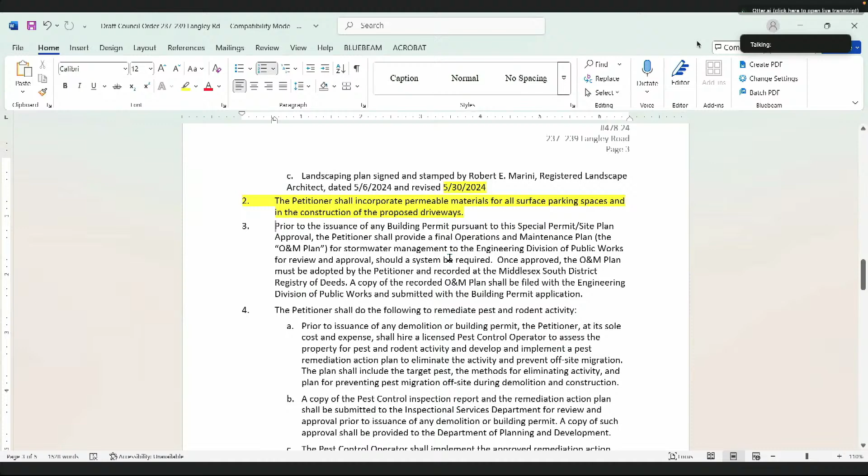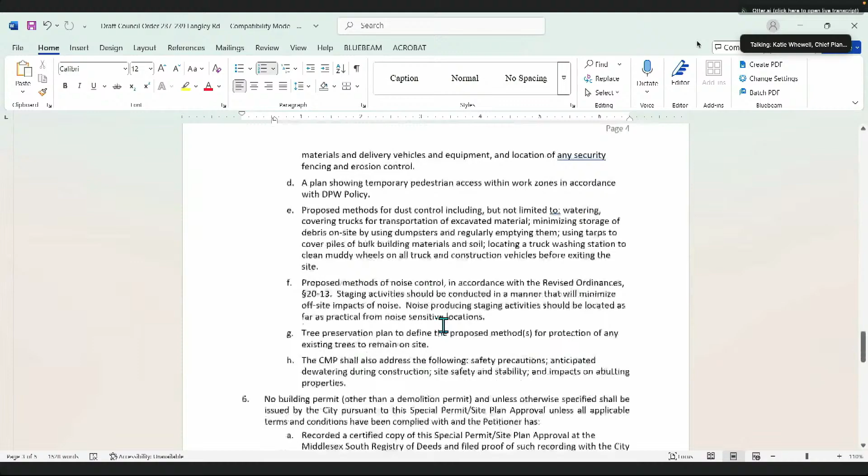Standard operations and maintenance plan, standard rodent control plan, construction management plan, standard building permit, standard occupancy, and landscaping to maintain that landscaping. So that concludes going over the order.

Thank you. Before we take this vote, I'd like to ask Mr. Morris a clarifying question, I'm not sure if I heard this properly. I very much appreciate that you're not going to stick with the previously proposed planting plan that was mostly non-native and partly invasive species, that's a good change. But did you say that the planning department is going to create the final plan? No, we will. Okay, yeah, because that is not their competency, we will. So perfect, I expect it's a condition in there. Okay, got it. Thank you.

All right, I think we're ready to vote. Roll call: Councilor Block, aye. Councilor Downs, aye. Councilor Farrell, aye. Councilor Kelly, aye. Councilor Leary, abstain. Councilor Lobovitz, aye. Councilor Lucas, aye. President Laredo. The motion passes, 6 yeas, 1 abstention.

Perfect. Chair members, thank you for the extended time with the hearing and letting us make our case. Thank you, we're adjourned.